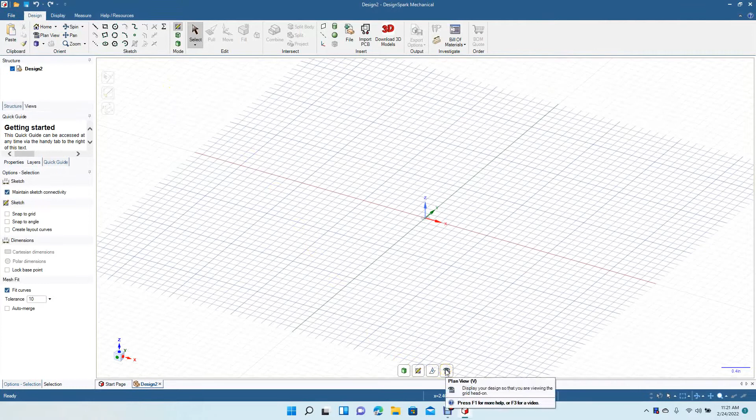So we'll go ahead and create a new design. We're going to do this in inches. We'll hit this icon to go to plan view. We're going to hit this resize up here to minimize.

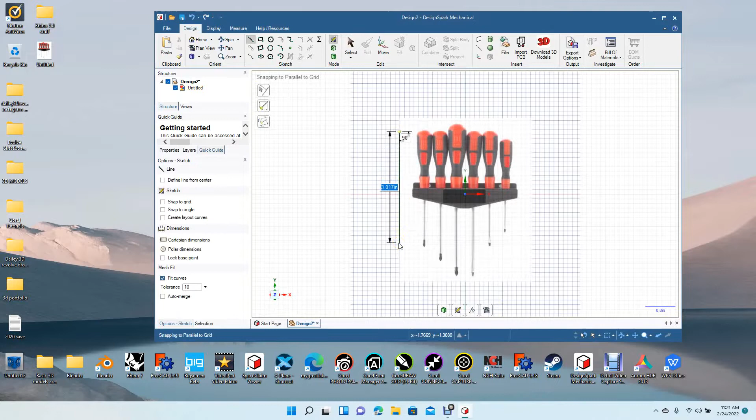Then we're going to drag in our sample file. Now I want to make sure this screwdriver here is at least 6 inches, so we'll go ahead and let's just type in 6 with our reference line. Select the click off. We'll full size this.

Now we're going to go ahead and grab this corner node here and hold down the shift key. That's close enough right there. We'll go ahead and get rid of that line. Now we're going to drag this little box here to the center.

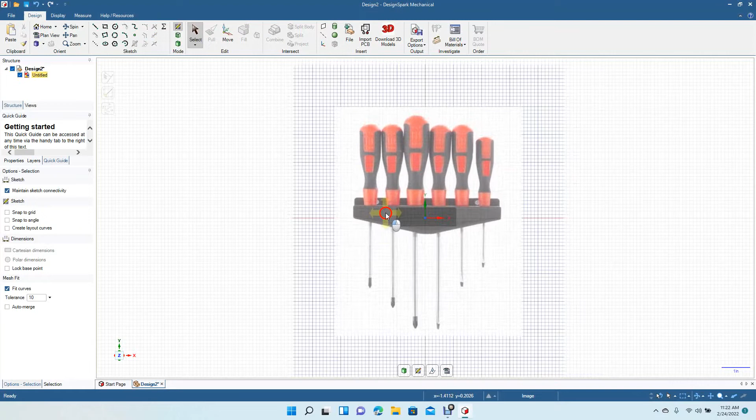Okay, now we'll Control plus. Now what I'm going to do is go ahead and put a line right in here. Doesn't have to be any specific size. Mine is 1.705. So I'll go ahead and select the click off.

We're going to right mouse click and set as mirror. Now we're going to start drawing. We're going to go ahead and draw out 2.578, and we're going to drag down 0.391. And then we're going to drag straight over here to, which is going to be 2.657.

Now we're going to get our line tool again. We're going to go ahead and click there and drag a line straight over. And then we're going to get our trim away. Going to trim away that piece there.

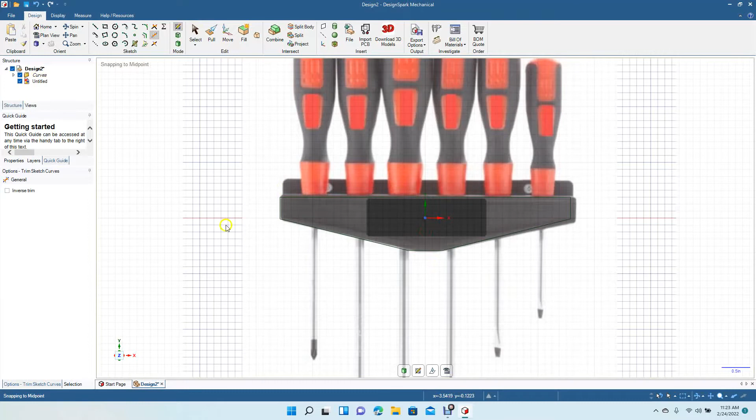Now we can go ahead and get rid of our mirror line. We don't need it anymore. I'm going to Control minus. We're going to click on that graphic, hit move, then we're going to drag it over.

Control plus. I'm going to add some thickness here to this piece here, so we're going to offset. Click that. We're going to offset it up. Let's go 0.3. Do the same over here, 0.3.

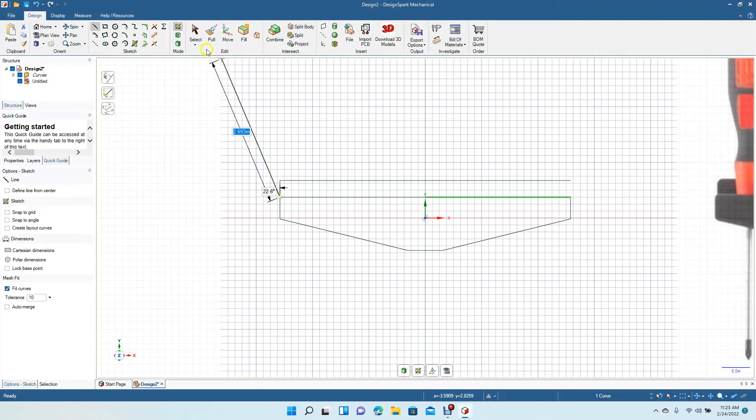Now we're going to get our line tool. We'll come down to here. So let's select the click off, and we're going to grab the line tool there.

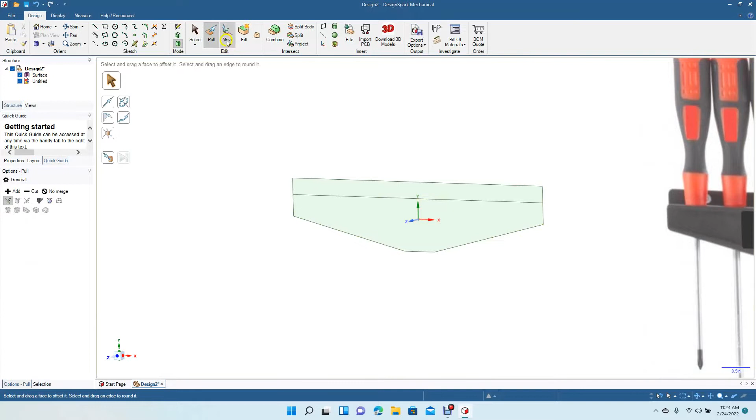Now I'm going to go ahead and spin this. I'm going to pull. I'm actually going to move this. So I want to go ahead and click on that and grab the blue. And I want to move this over. Let's just type in 1 for 1 inch.

Okay, now I'm going to go copy, Control C, Control V, and then I'm going to grab the move, and I'm going to move this back 1 inch. Okay.

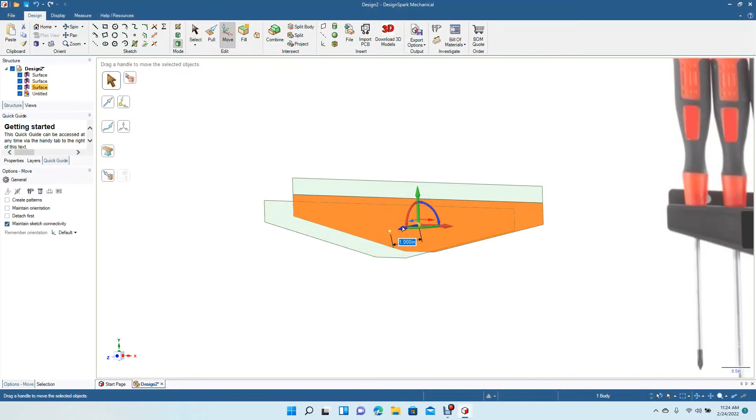I'm going to go ahead and I'm going to blend these two together. So we'll go ahead and get the blend tool, go from there, hold down Control key to there. Then go ahead and click your green mark.

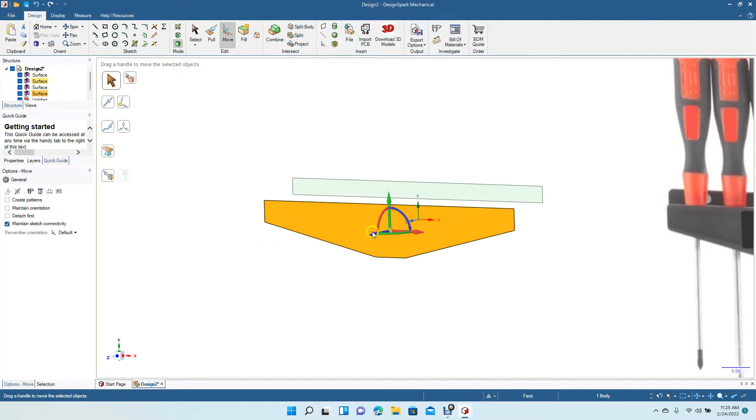Actually, undo that. Couple of undos. Oh, I didn't want to go undo that far. Okay, so back to copy, paste. Go ahead and move that back to 1.

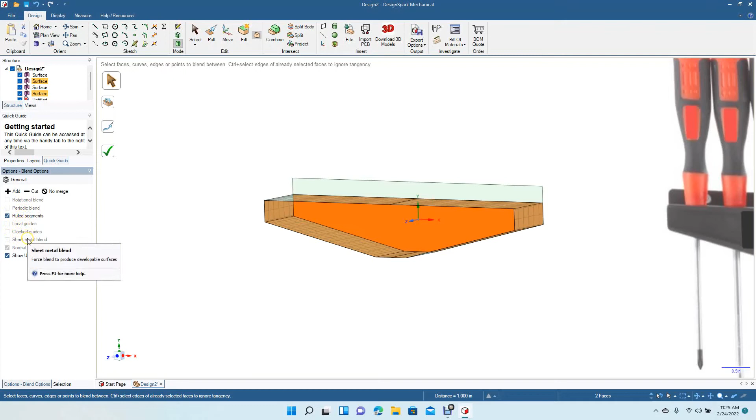Okay, now we're going to blend. We're going to blend the back one to the front one. Hold down Control key and make sure that you've got ruled segment there. Is it ruled segment? Yeah, I guess it's ruled segment. So go ahead and check your little check mark there.

We're going to go ahead and spin this. All right, I'm going to shell this right here. So we'll go ahead and get the shell tool. And then we'll shell both of these.

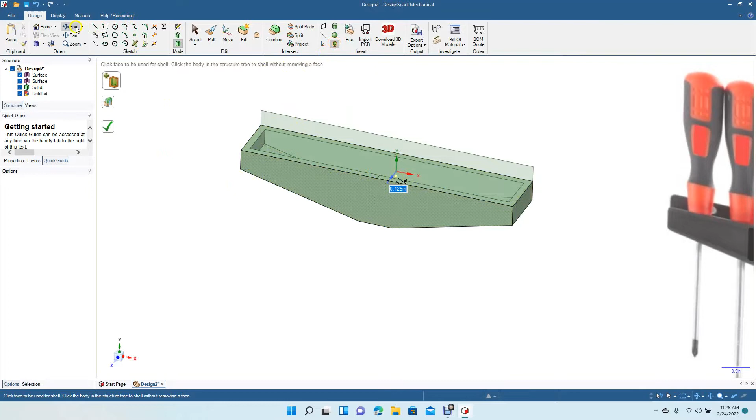Now we're going to go ahead and spin. Now I want to pull this. So we're going to go ahead and click on that. We're going to pull up to, and then we're going to pull up to there. Okay, now we have this back piece.

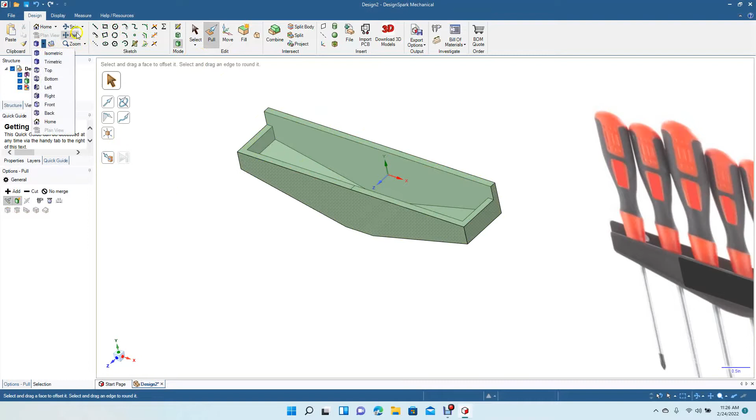Okay, now we're going to go ahead and spin this. All right, let's go ahead and grab the pull. Let's pull that a little bit. I think this is 0.1. And then we're going to do the same over here.

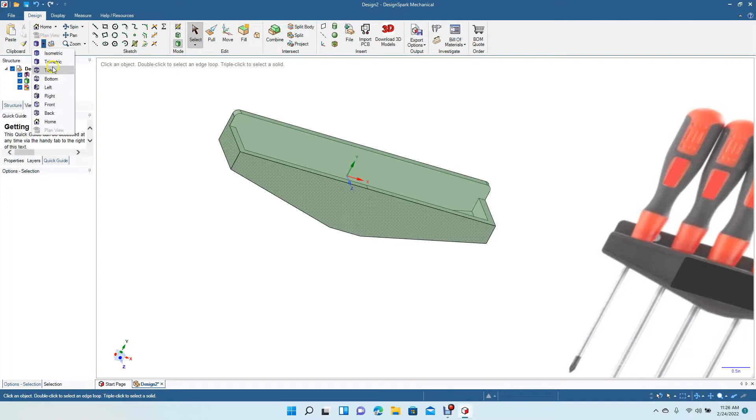Click and drag that till it's at 0.1. Okay, now we'll go ahead and go to the top view. Now we need to put a hole here and a hole here for our screws.

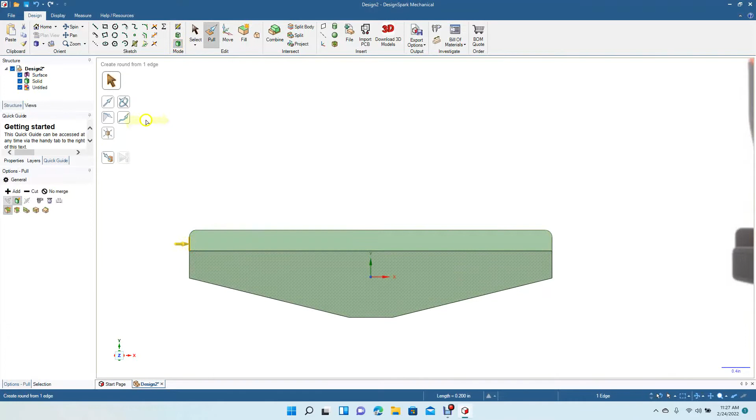So we're going to go ahead and Control plus. Let's pan over. I'm going to offset that line. Go back to there. Go to offset. Okay, we're going to offset this over.

0.4. And now we're going to do the same over here. Let's go to offset. Move this over 0.4.

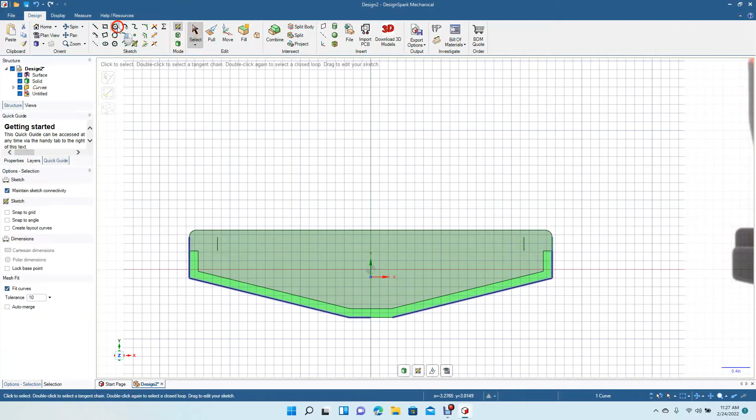Okay, now we're going to go ahead and get our circle tool. We're going to create a circle that's 0.125. Okay, and then we'll come over here and click and drag out another 0.125. Let's Control plus. Let's go ahead and get rid of that reference line there.

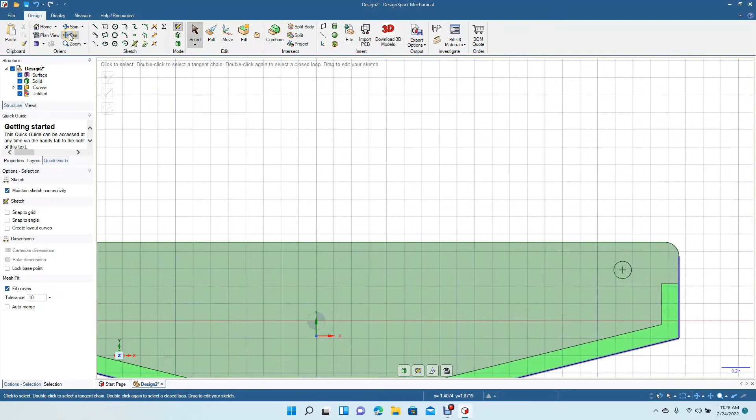Let's get our pan. We'll pan over. We'll select that reference line. Delete. Now we're going to go back to our 3D mode by clicking that. We're going to spin.

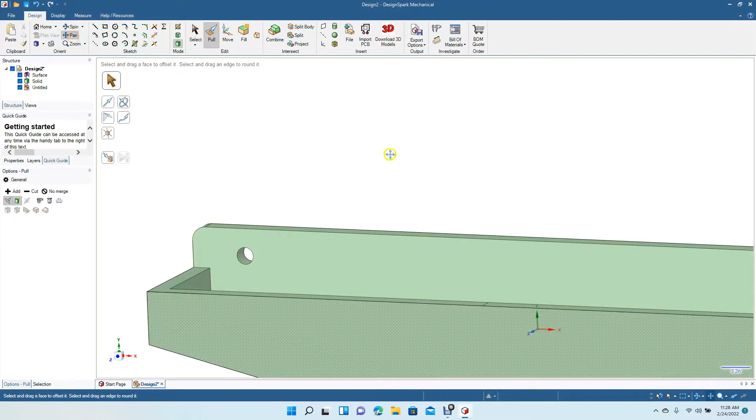Let's pull this straight through. Okay, let's pan over. Let's go ahead and pull. We'll pull that one straight through. Now we're going to go ahead and spin this.

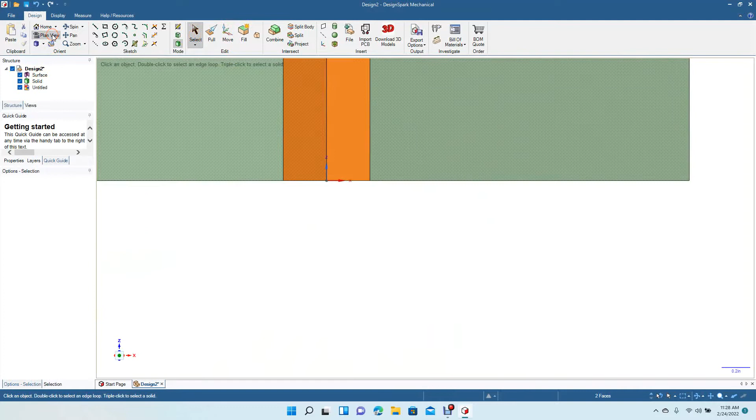Let's go around to the bottom there. We're going to click on that, these two faces here, and hit plan view. Let's Control minus. Let's go ahead and put a plane out there.

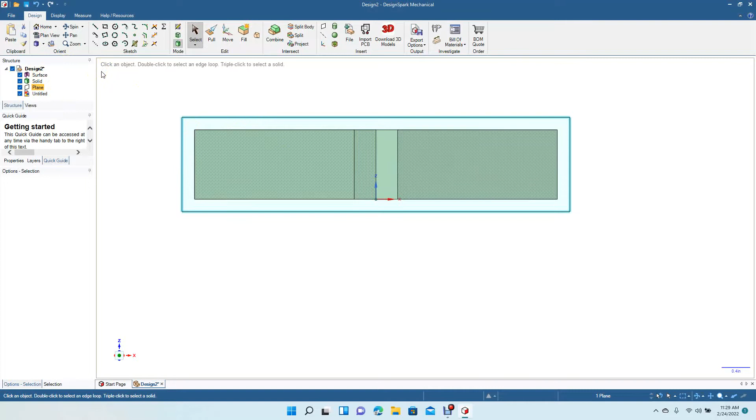Now I got to make sure that the holes, there's 6 of them, but they have to be spaced off enough so they don't interfere with each other. So we would need to leave at least 1.5 inches probably in between them.

So we'll go ahead and get this. I'm going to click there. Actually, let's make sure, undo. Let's go back to your 3D mode. Make sure you're on the plane.

So select the plane, click your circle tool, select the plane, click here. Let's make... I guess 0.2 would be pretty big, that's almost 1/4 of an inch. So we'll go 0.2, we'll make our holes that size.

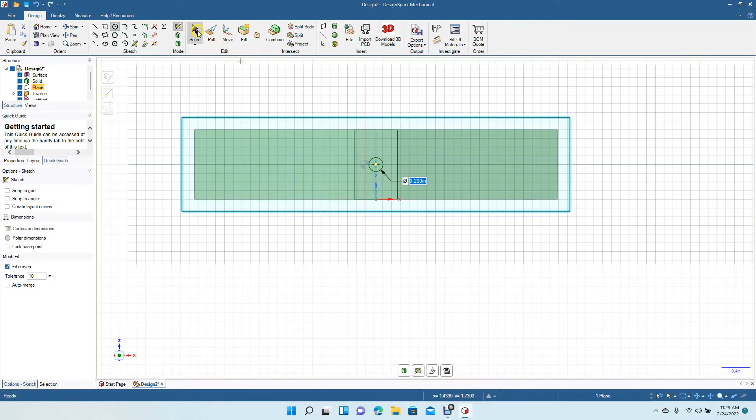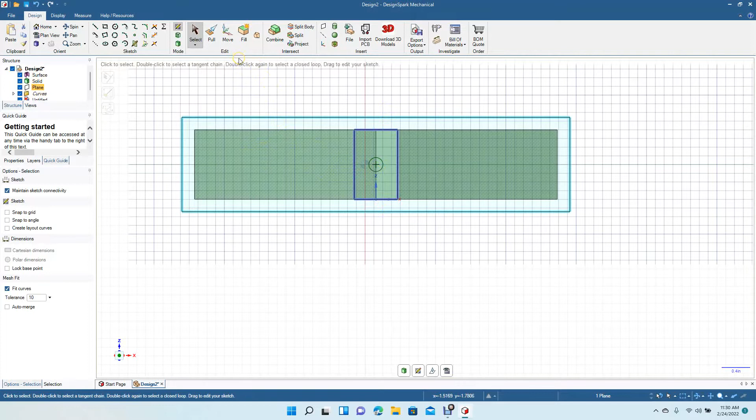That's going to be enough. So then we're going to go ahead and let's see here. Let's go over to, let's select the circle that we just created, and then go ahead and go Control C, Control V on your keyboard, and then we're going to move.

We're going to move this over 0.5. So let's type in 0.5. Okay, and then select to click off. Now you're going to have to Control V again to put the circle back.

You might even go farther. Let's undo that. Okay, let's move this. Let's go 0.7. Select to click off, Control V.

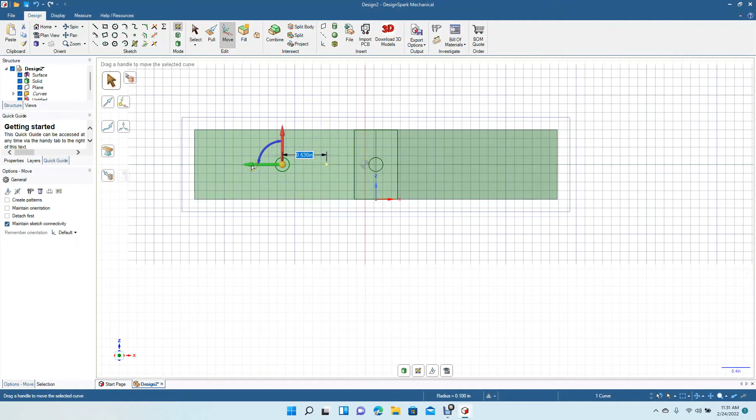Okay, now we're going to do the same here. Click this, we're going to move. We're going to Control C, Control V, and then we're going to move it over 0.7. Okay, select to click off. Now Control V to put that circle back.

So now you've got 1, 2, 3, 4, 5, 6. You got to space them out even farther than that. Okay, so let's see here. I think a better way to do this would be to go ahead and...

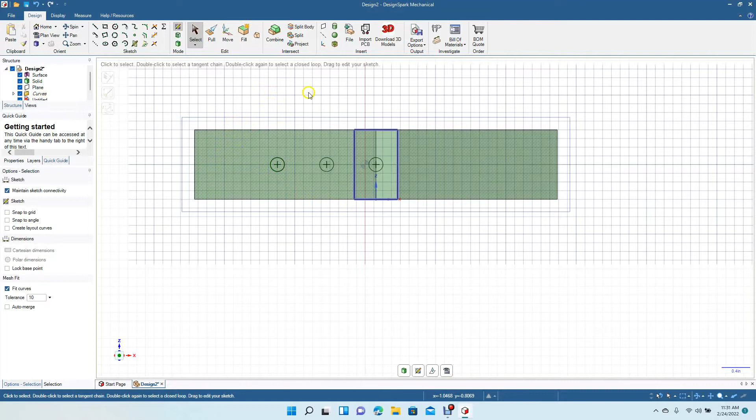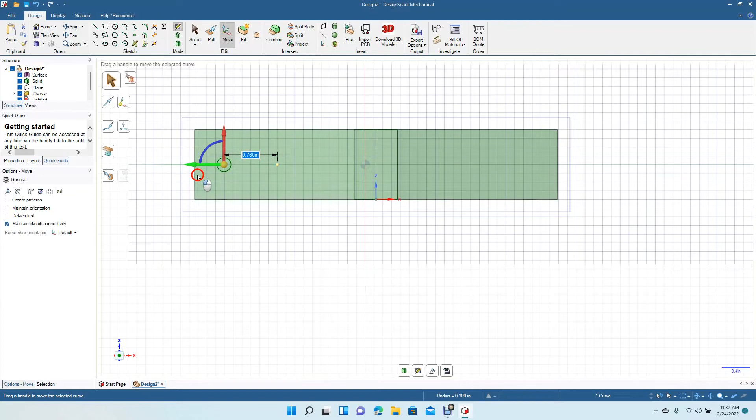Let's go get rid of these circles. Let's move this over. Let's move it over to about right to here on this line here, which is, we'll just get it close to there.

Okay, now what we're going to do is create a pattern, which I should have done before. So we'll go ahead and select move, hit create pattern. Then we're going to drag this one over. This is 1, 2, 3, 4 lines over, so we'll go 1, 2.

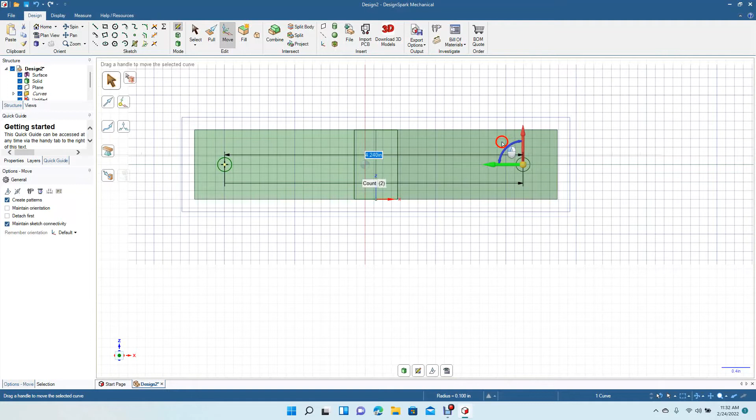We'll go to about there, and then in the count we're just going to put 6. That'll actually do our spacing for us. Now we're going to select the click off, and then we're going to spin.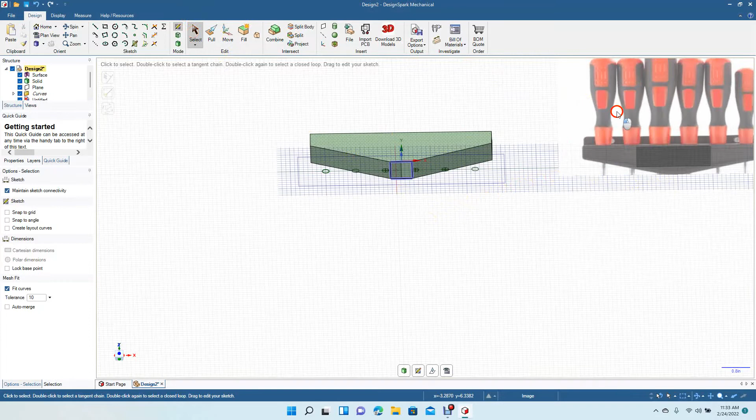Let's go Control minus. It looks like there's a screwdriver there. There isn't one in the center, so this is actually good. Let's go ahead and get rid of this, we don't need it anymore. Let's Control plus.

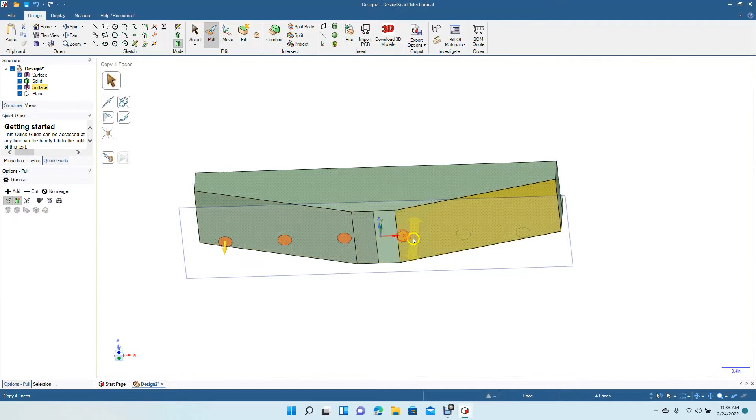Let's pan down, go ahead and spin this. We're going to pull these. We'll select all of these by holding down the Control key. Now we're going to select cut, and then we're going to pull straight through.

Select the click off. You can get rid of that plane, we don't need it. Okay, now let's spin this.

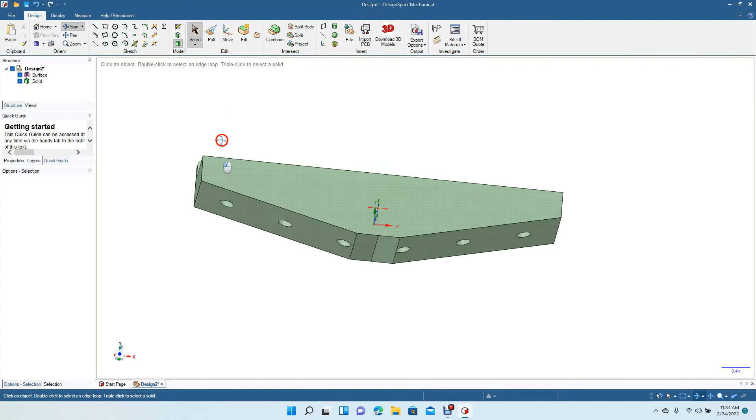I'm not real crazy about where that hole ended up, so I'm going to go ahead and move that. We'll click that, go to the move, and just drag it over a little bit so it's not right there on the corner.

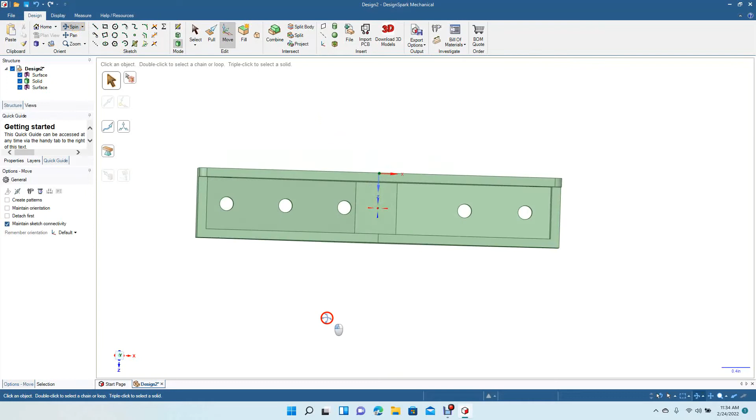Okay, now we'll go ahead and spin. Now you'll have to pull that again, so go ahead and Control plus to zoom in. Let's select that little piece right there. Control plus one more time. Grab that sliver, hit delete.

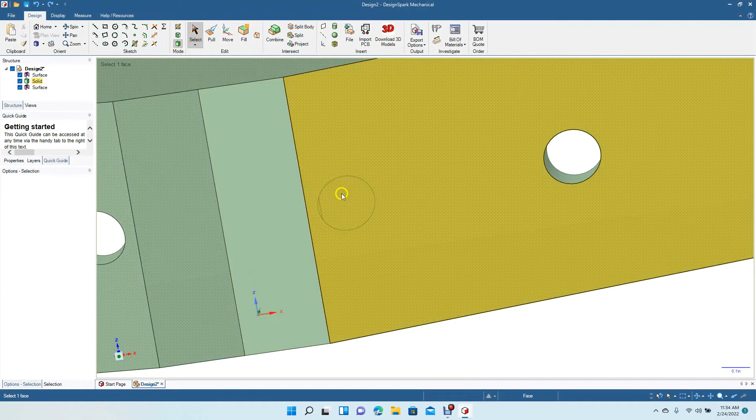Oh actually, you know what, I didn't want to do that. Control minus. We're going to pull and then hold down Control. Let's click that, let's hit fill. That's not what I wanted. Okay, let's just undo that. Undo.

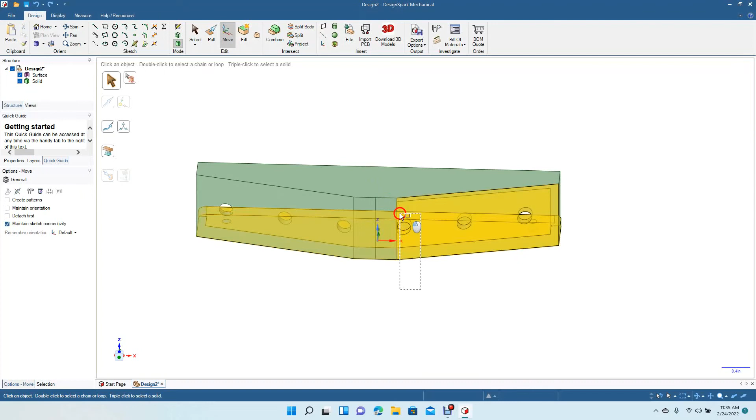Control plus. I'm not sure I'm going to be able to move that. Control plus, let's spin this. Let's just hold down Control button. Let's get all those pieces.

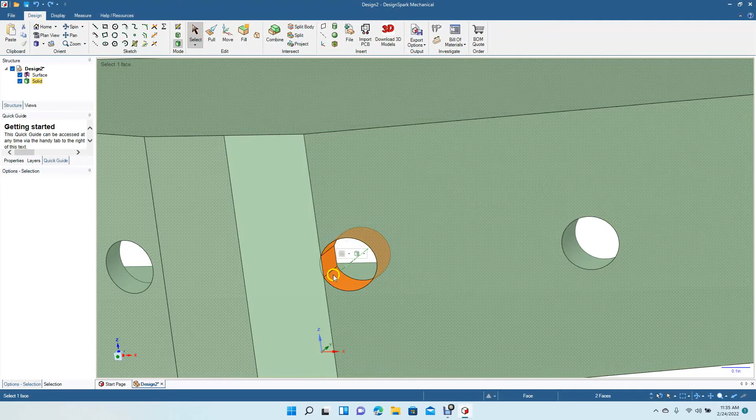Let's go to move, grab the red. Let's get this one too. So we'll have to Control plus to zoom in. Hold down Control and then drag this over.

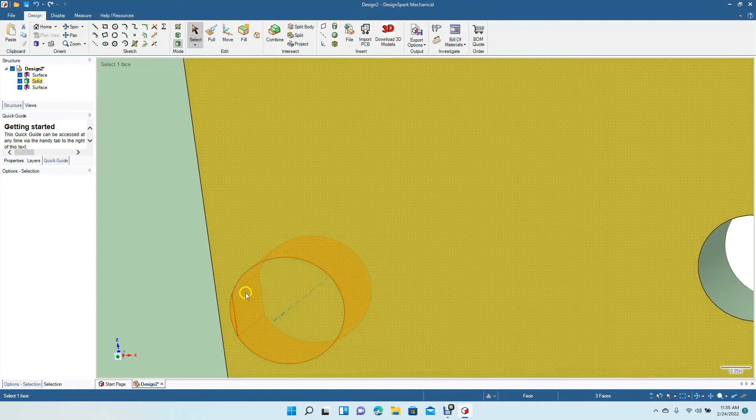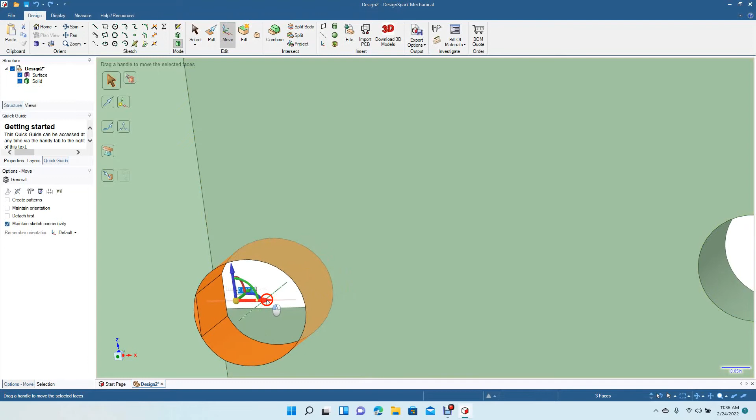It's becoming a problem there. Undo. Guess I'm just going to have to leave it there. It's okay, it's not too bad. Ideally we'd want to have it away from this corner here, but that's okay.

So this is going to be, these are going to be the holes where your screwdrivers go, and there'll be 6 of them. Now I'm going to start adding some detail to this.

Let's go ahead and get the pull tool. Let's click Tilde, that's selected and go ahead and pull. Let's do 0.2. Let's drag that to 0.2. Let's drag that to 0.2.

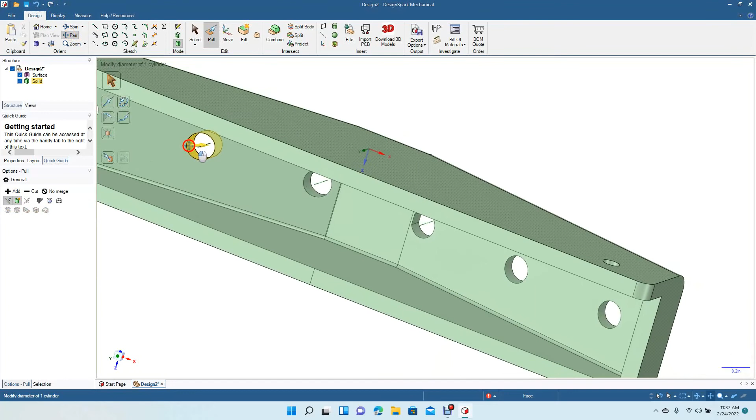Let's go ahead and spin this. Select pull, let's pull this piece right here. 0.2, and let's pull that to 0.2. Let's pan over a little bit. And let's grab this one here, pull to 0.2.

Okay, let's go ahead and spin. Let's give this, select these. Oh, 0.2. Let's pan over. Let's do the same on the outside. 0.2. Let's pan over.

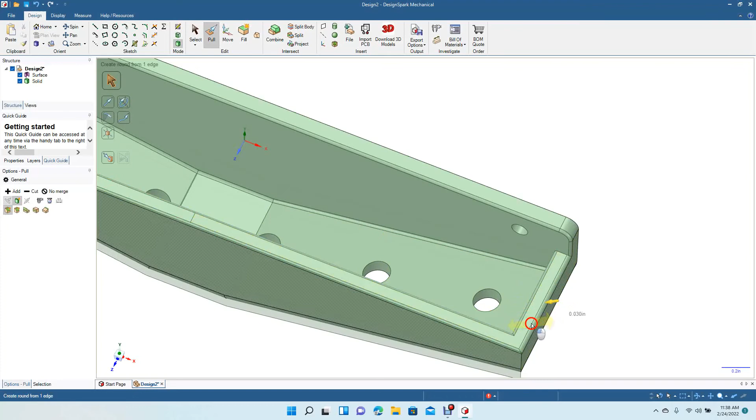Okay, let's get these right here. Oh, 0.2, let's get that one. 0.2, let's go to top view. Let's spin this.

Got a weird piece right here. I don't know, I think we just select it and hit delete. I got a strange chamfer in there. I didn't want that to be that big, so we'll have to go ahead.

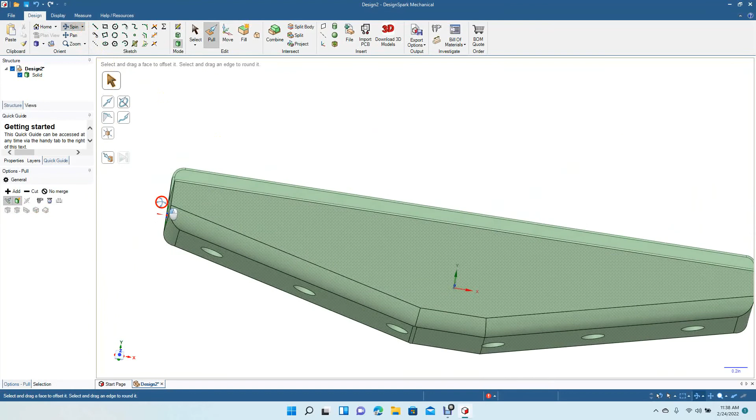Okay, I guess that's okay, we're just going to leave it like that. Let's go ahead and put a 0.2 in there. Let's put one over here.

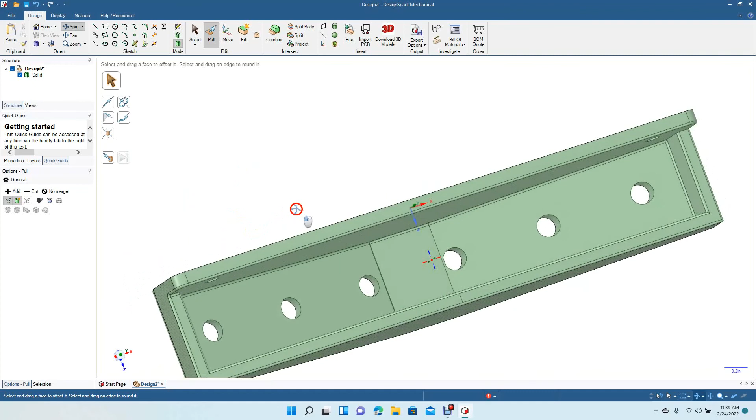Go ahead and spin that. That looks pretty good. Flat on this side, so we could screw that into the wall.

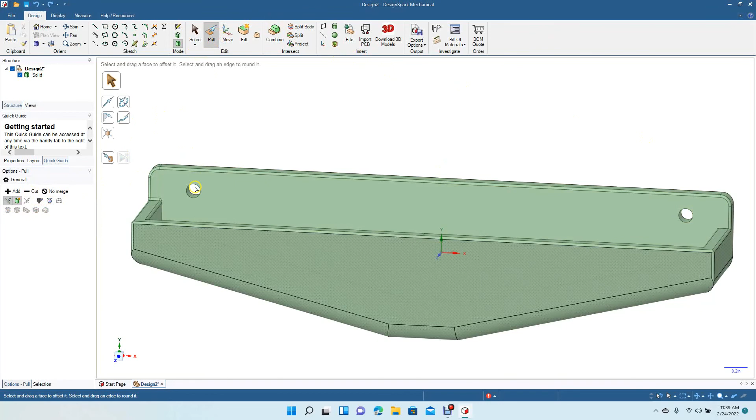Okay, that's going to end today's tutorial. The only other thing I'm going to do is add a small 0.2 fillet there. Actually, let's add a chamfer. Let's go ahead and go to pull. Let's select that, let's change from fillet to a chamfer.

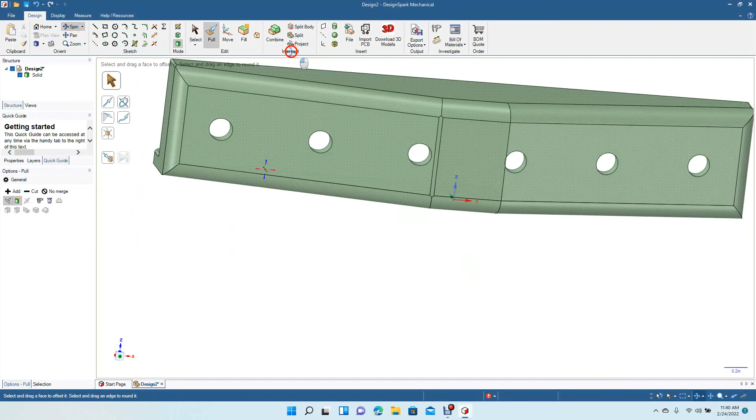And then do 0.3 so the screws will go in there. 0.3, okay this looks good. I don't know how my fillets got so big on the outside, but I don't think it looks that bad. I'm okay with that, we'll go ahead and keep it.

Okay, this is going to be our screwdriver holder, holds 6 screwdrivers. Go ahead and bolt that into the wall, and then you'll have room for your screwdrivers right there, 6 of them. Okay, that's going to end